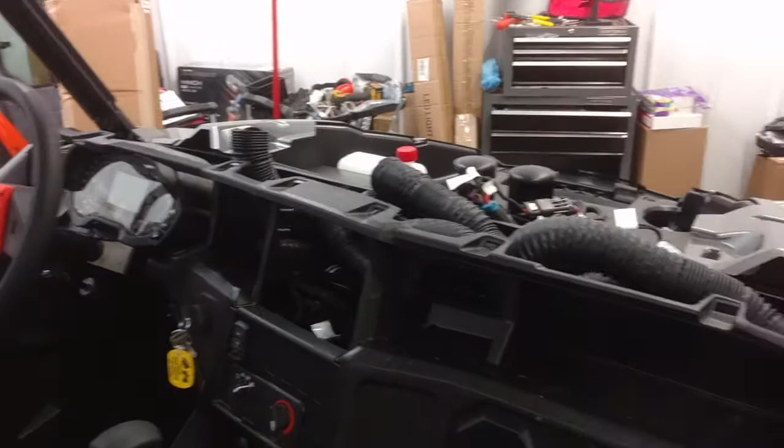If you're just putting a wiper in a machine that does not have the overhead radio or a mirror, you can probably just skip the first few minutes of this video and get into the portion where we're actually putting the wiper on the windshield and running the wires. The wiper is mounted up top, and then the wires are ran down through one of the roll cage members, across the dash, and then everything comes out by all that other wiring there.

I already have the top cap off of this one. I actually just put a heater in this one, so I never put the top cap back on. I believe that is the first step in the instructions, but first we're going to hop and see what's in the box.

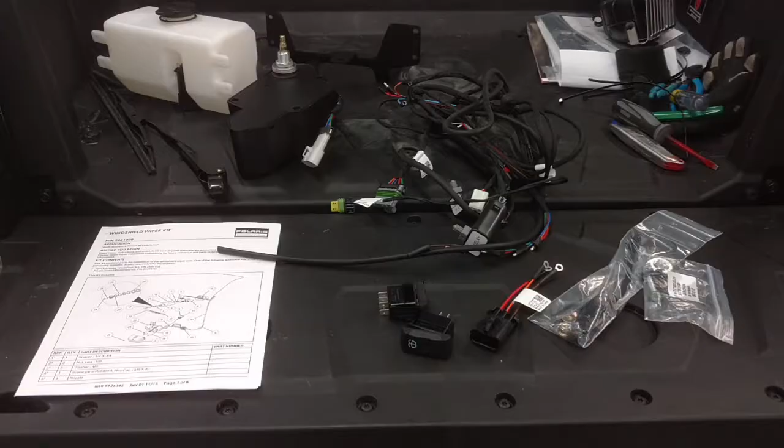Here's everything out of the box. The part number for this kit is 2881090. It is the OEM Polaris kit.

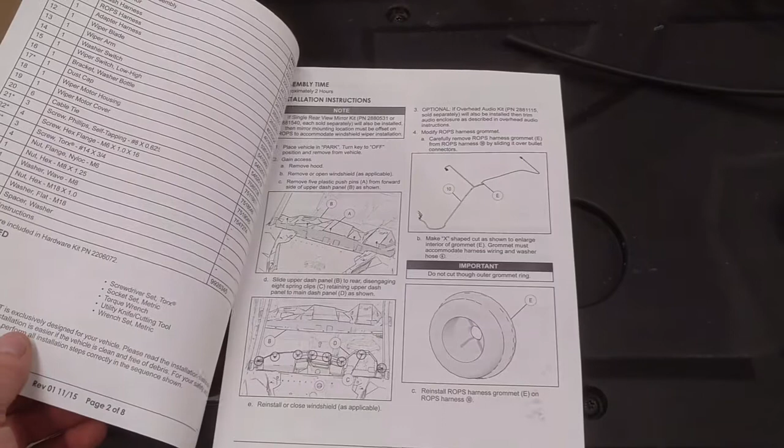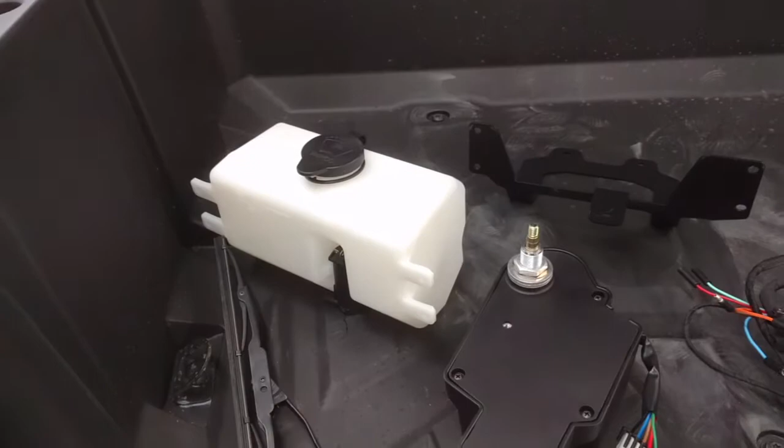I've put a few of these in. You got the wiper - I just put the arm and the blade together already. Washer tank, the wiper motor itself, the bracket for the washer tank, the wiring harness and the tube for the washer fluid, some switches, and then some hardware.

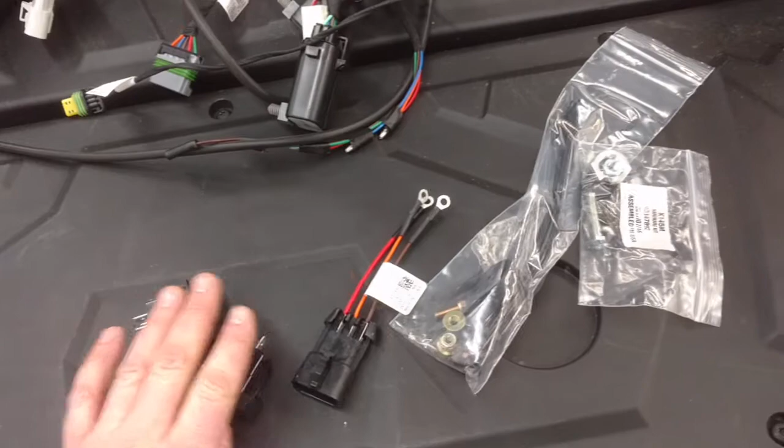First thing I'm going to do is remove the roof, if you have one on there. That is those two bolts right there, and then that bracket comes off, and then this entire back panel kind of pulls back and up.

Once you clear the top of the roll cage, then the entire roof can slide forward to release those claws that are grabbing into this piece of plastic right there. So start by getting those two bolts out in that bracket, and we can take the roof off pretty easily.

Here we have the roof off. Now what I'm going to want to do is take this panel off while keeping the radio installed. I'm going to attempt to do this while the radio is still in the machine. If you don't have the radio in the machine, if you got it out of the box, it'll be even easier. But I'm going to try to see if this works.

You need to take out this screw, that screw, those four on the top, and then there's two more on that side, just like this one. Be careful when you take these out - there's a little spacer that's underneath between kind of the radio and this piece of plastic here. Make sure that doesn't get lost.

So there should be 8 screws total, I believe. I think we need to leave those two on each side to keep the radio in place. So I'm going to pull those screws off, and then I believe this whole thing can actually slide forward and come off. There was 2 more screws that I forgot.

This one right here, and then that one right there. Once those come out - I dropped a couple spacers, even though I said to watch out for that, so they might come falling out. This whole thing pulls out.

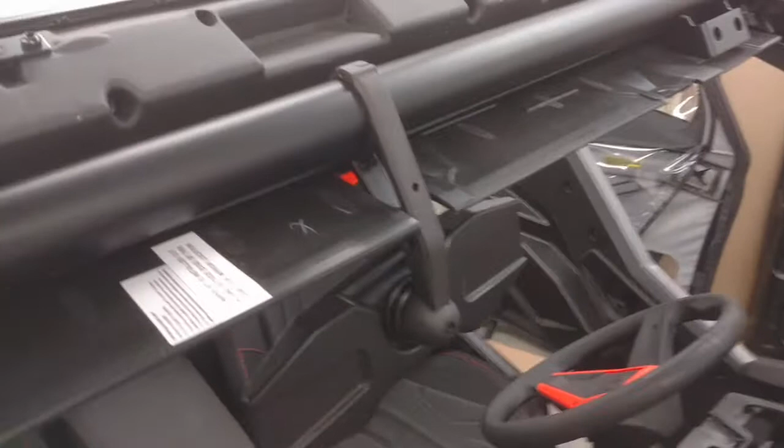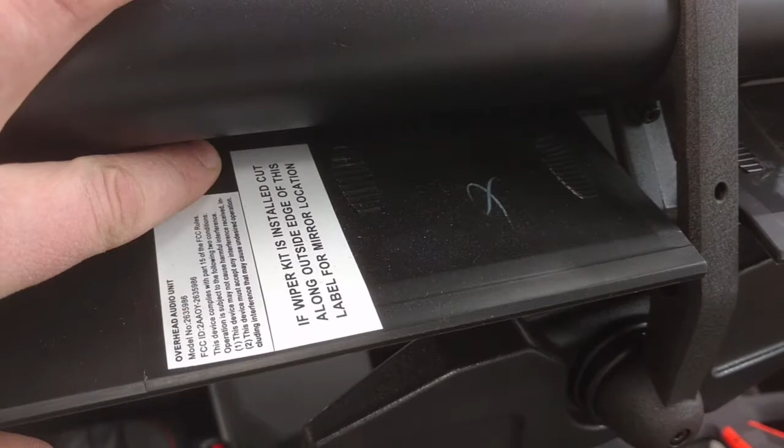And what we're left with is kind of the exposed part of the radio up there. And what we need to do is, right where that sticker is, if a wiper kit is being installed, cut along the outside of this label for the mirror location. So you literally take a knife, cut the outside of that sticker through the plastic, and then we're going to be sliding the mirror over, I don't know, about 6 inches or so.

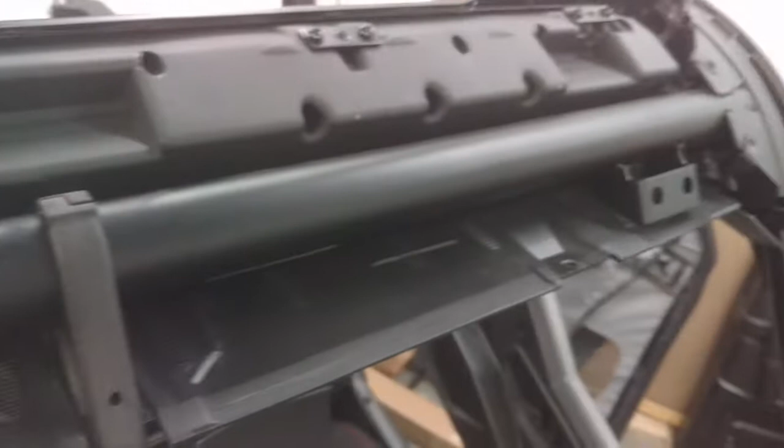There's a scribe mark here, a weird trapezoidal shape, that we need to cut out because the wiper body needs to fit in there. This would be easiest with the radio out of the machine, but I don't want to undo all the wiring and bolts, so I'm going to cut it out with a utility knife while it's still in the machine. I just need to follow the line, connect the dots, and cut out that sticker. Then we move the mirror over so we can mount the wiper to the windshield, and that plastic won't be in the way anymore.

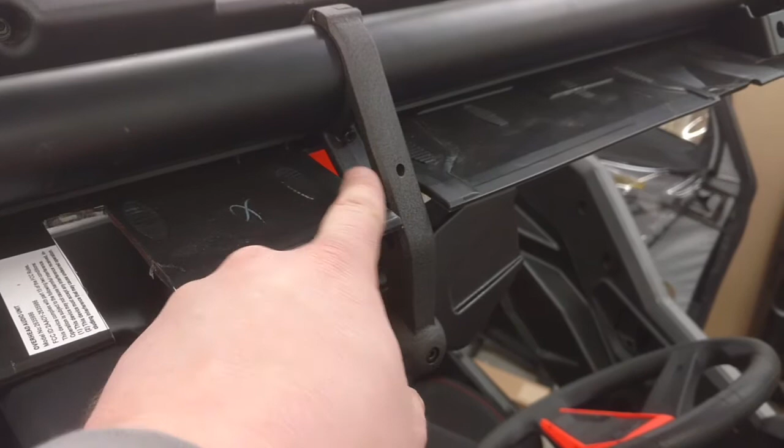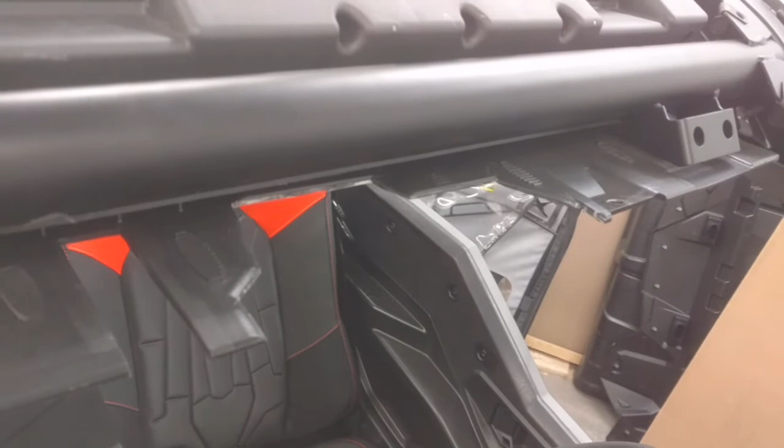I'm going to get that cut out. There, I got that piece of plastic cut out. Now I'm going to stick my Allen wrench through this hole so I can loosen that and slide the mirror over to this position. I've cut out that template just using a utility knife - it was really soft, I didn't need anything else. Just follow the lines; the one under this bar is a little hard to get at. If you cut everything else out and then just score that one, you can bend it and it snaps.

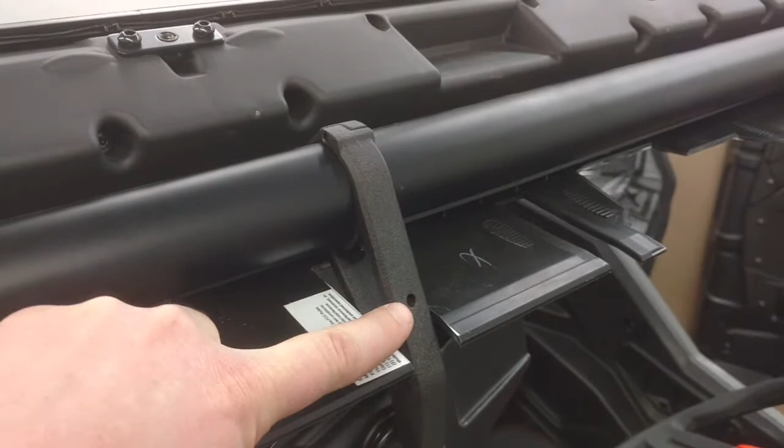Move the mirror over and then tighten that down with the Allen wrench that goes through that hole. We've done the modifying that we need to do. Now we can just hop into the instructions and follow through with them.

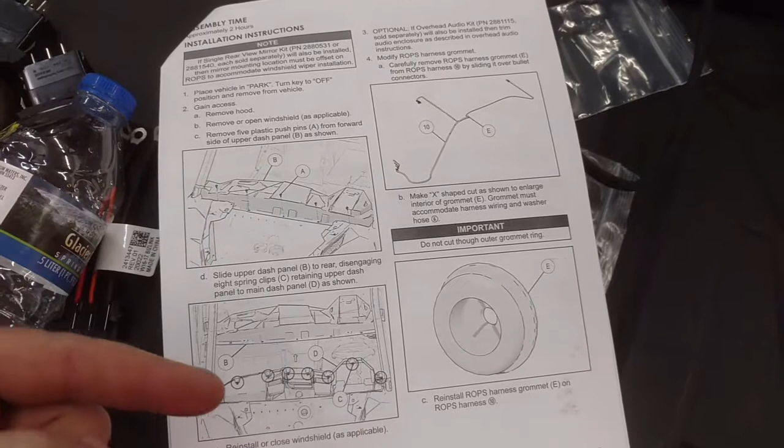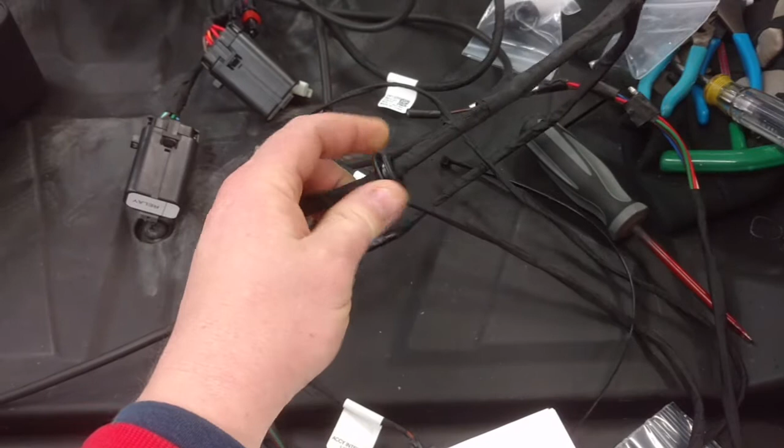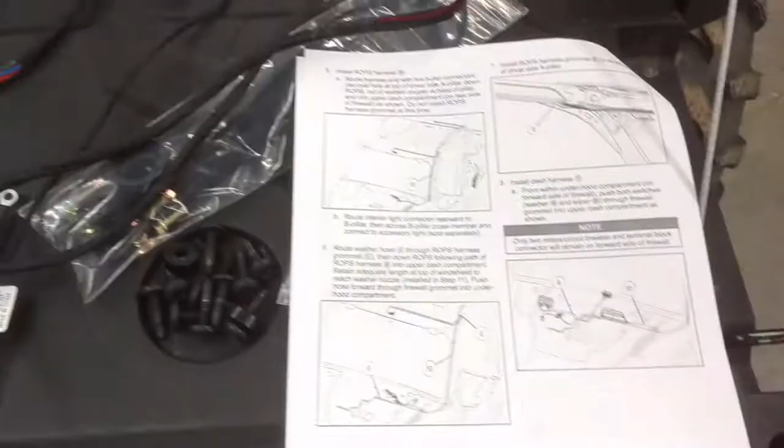We've already taken off the top cap. Now we've got to take the wiring harness that goes through the ROPS system and peel the bushing, or grommet, off of there. We need to get this off by sliding it and actually cut it a little bit bigger so that we're able to slide this hose through it as well. I cut some marks in that grommet so there's more room to slide the hose in. Now we're actually running the harness - it does go through the ROPS system.

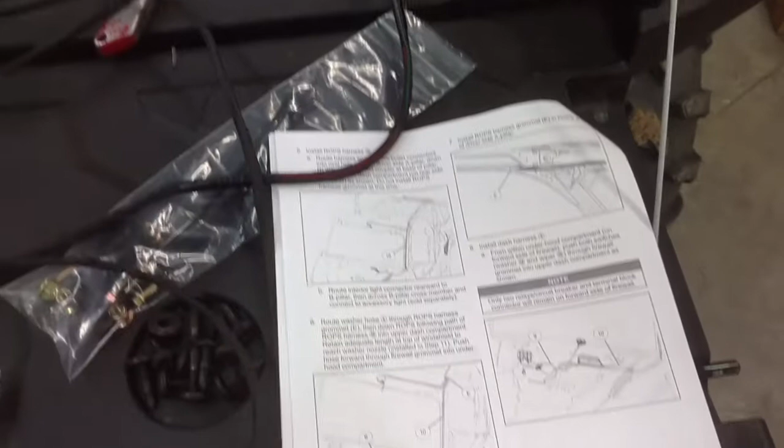So the top end is going to be these two plugs: there's the wiper plug, and then there's a dome light plug that just comes on this unit. Then on the bottom, you have a series of bullet connectors, which is going to connect to the main wiring harness once we have it run.

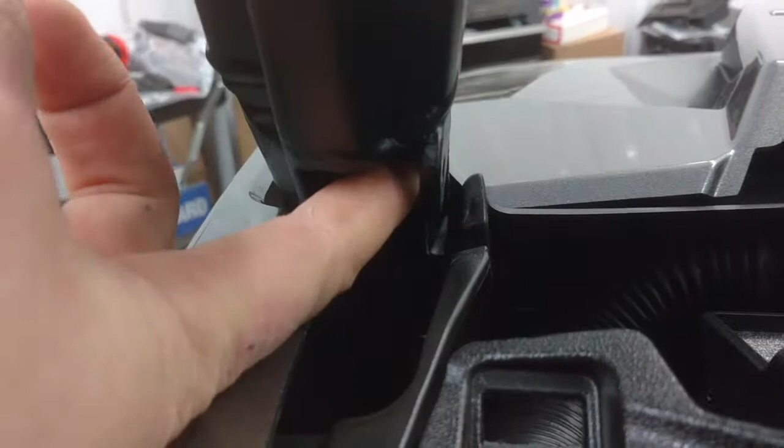So what we need to do is take that harness and slide the bullet connectors - I can't see it very well, but there's actually a hole here. Put the bullet connectors in there, feed it down through, and then they'll be coming out right here. Then they go through this little channel and end up right about here, where we will connect it to the main wiring harness once we run that as well.

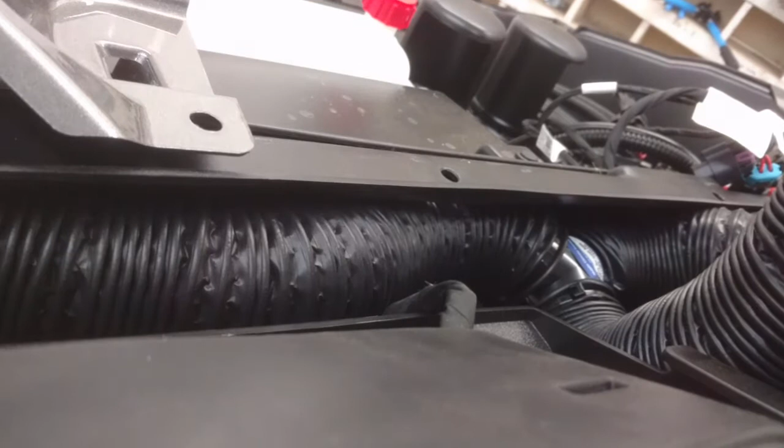So we're going to run both of the harnesses. This is the hardest one just because we have to run it up through the tube, and there should be the plug and then another 3 feet or so of that other plug for the dome light. I tried sliding it down and I couldn't get those bullets to go through the bottom hole very easily.

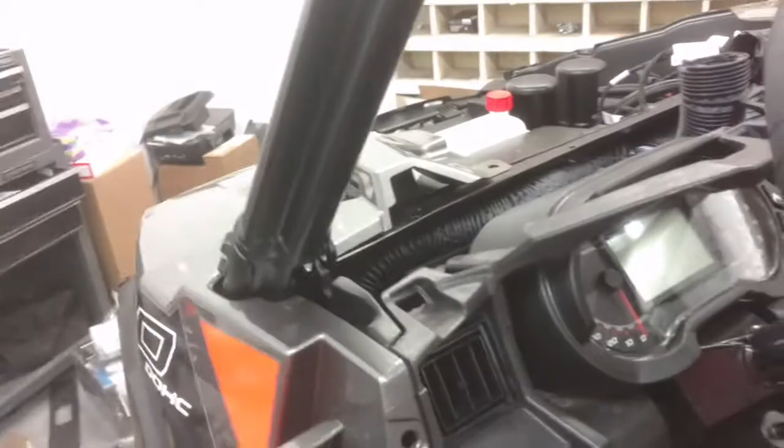So I just took a piece of mechanic's wire and a little electrical tape, and I think it's going to make it a little easier to get out the bottom. So just feed it through. And I was having an issue with it lining up with the hole at the bottom.

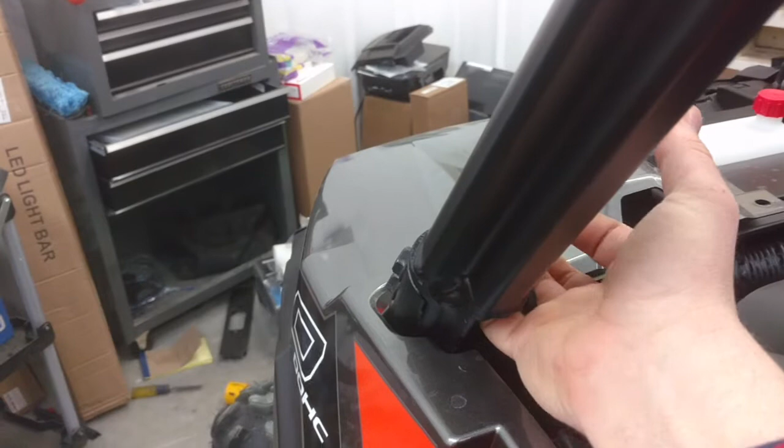This is kind of hard to do. You just need to keep poking at it until you get it to come out the bottom hole. Once you get the wire started, you can grab it and pull the rest through until you get to the grommet location, or where it was originally on the harness. If it does need to move later, that's fine. Then the grommet just squeezes into that hole we had there so the wires aren't leaning up against the sharp edges.

Alright, after fighting with this thing for like 15 minutes, I decided to take a different approach. I've done these many times in the past.

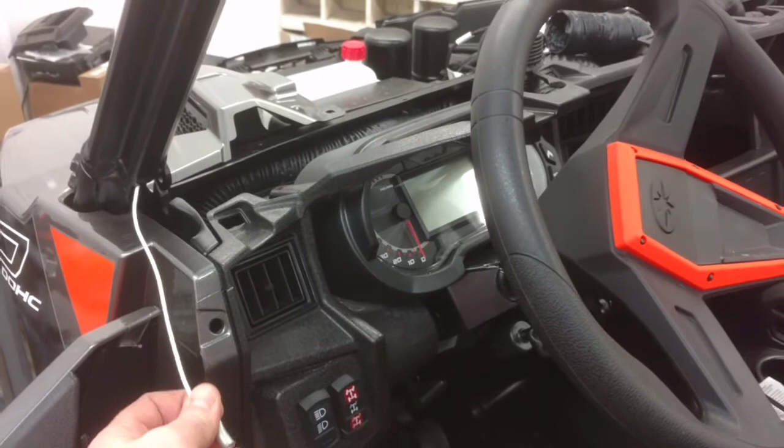I just ran into an issue with it wanting to come out the bottom, so I took a little weight, which happened to be a terminal connector, taped that to a piece of wire, and was able to slide it through and eventually find the hole at the bottom.

Now I can tape the harness onto this wire. We want to run the water hose at the same time, I guess I never said that, but yeah, the water hose goes at the same time. We'll tape those to this wire, and we should be able to pull the whole works through just by pulling this white wire through all at the same time.

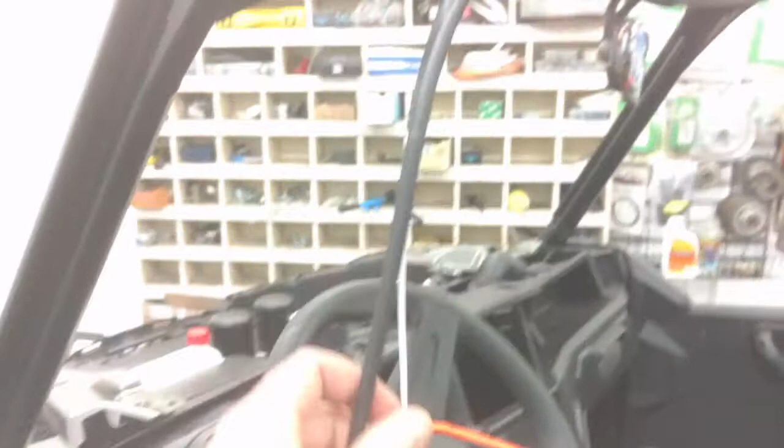So here's how it looks when I got it hooked up. I got the harness and the washer hose taped together, and then both of them taped to this white piece of wire. As I pull on the wire, you're going to have to kind of pull at the bottom while finessing it through the hole at the top. We should be able to pull it through. Here I got it down through the bottom.

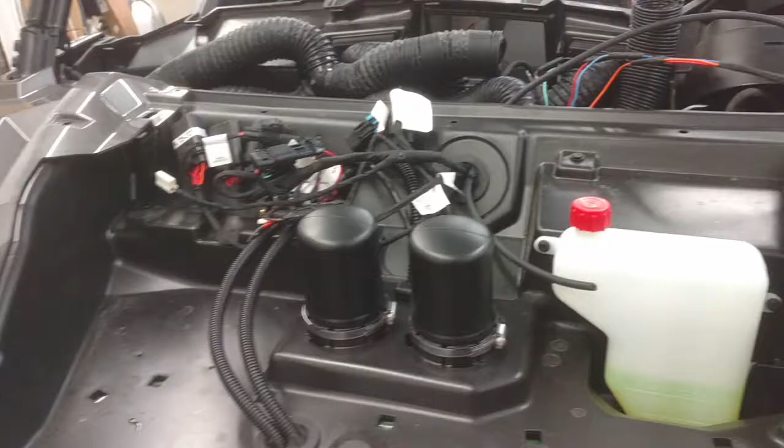So right now, once I get the wiring harness to pop through the hole, I can undo the white wire, pull that free, and then get the harness aligned where I need to. I think this grommet's in approximately the right location, but we should be able to move that or the wire/hose individually later. I did quite a bit in this step, but it should make sense.

The main wiring harness had 2 relays. You poke a quarter inch hole in those little dots, and that's where the 2 relays plug in.

There is a plug-in for the electrical, so that has the battery positive, battery negative, and then the key-on switched wire. That's just an unpluggable connector with the powered ends. This powers the whole harness.

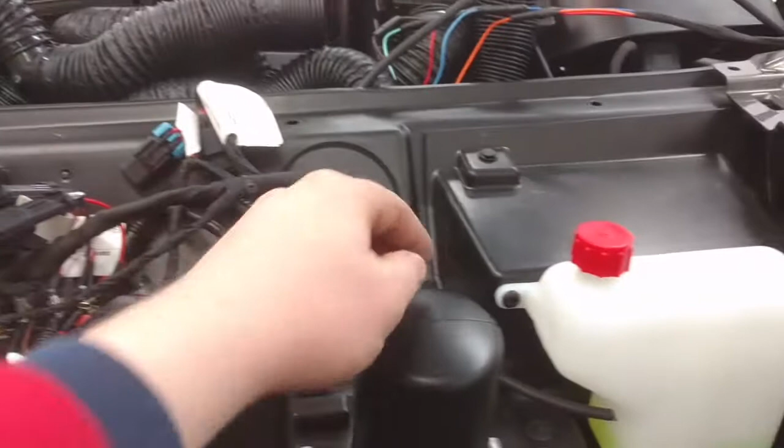We have this piece, which is going to plug into the washer tank when we mount that, as well as the washer hose. I might need to pull a little bit more of that out of there, it looks a little short.

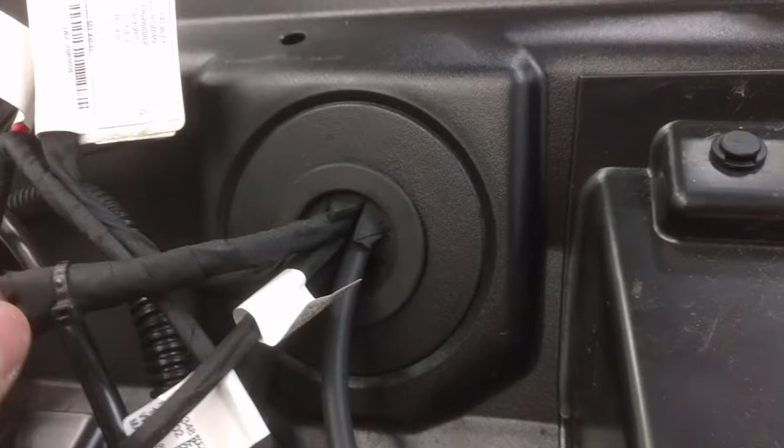Through the grommet, all the wires have to go. So a lot of times I'll just pop the grommet out, slide the wires through, and then put it back in. The switch wires go...

...up to that panel right there. We got to cut out the cutouts for that. That hasn't been done yet.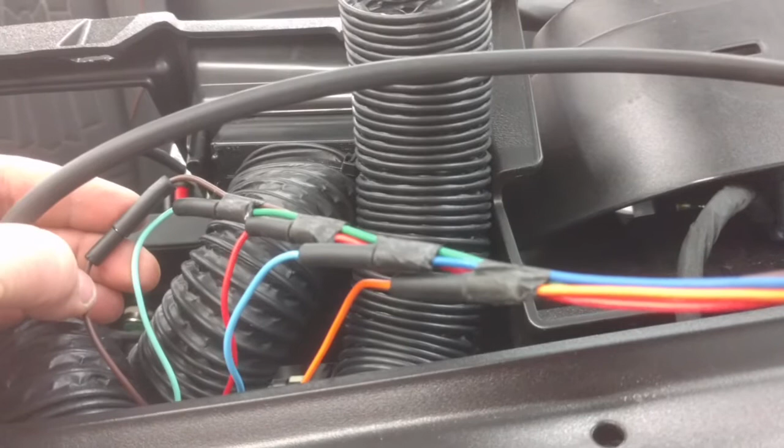Here's where the two wiring harnesses connect. It's pretty easy, you really can't screw it up, you just color match the wires: orange, blue, red, green, brown. And then I'll tape that up.

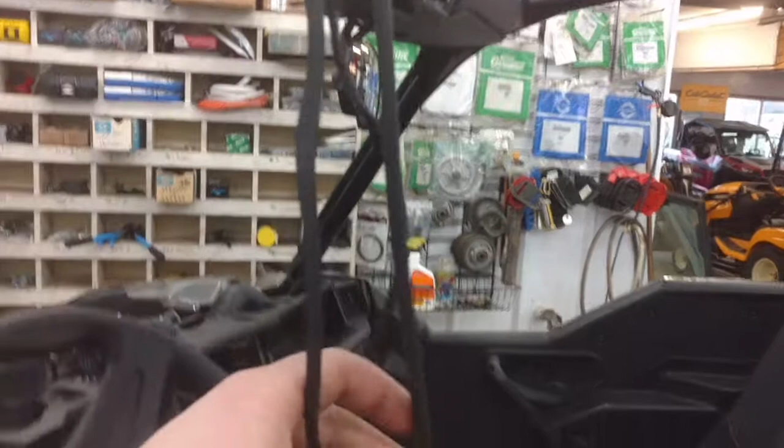And then they come down through the frame there, that goes up there. Eventually we're going to run the big plug and the hose over to approximately where the rearview mirror is, and this back one goes around back here, but we can do that once the roof is on.

This isn't even a wire we're going to be using in this install, but if you put a dome light in or some other accessories, you have a key-on power wire for something like that.

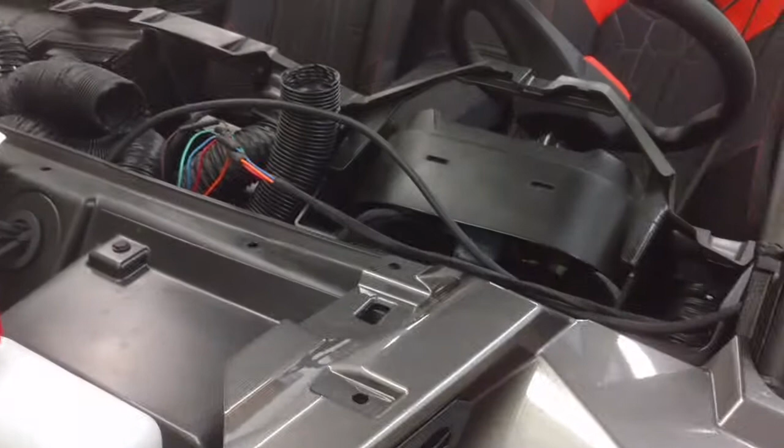I'm going to get this straightened up, and then I believe the next part in the instructions is to cut out those holes.

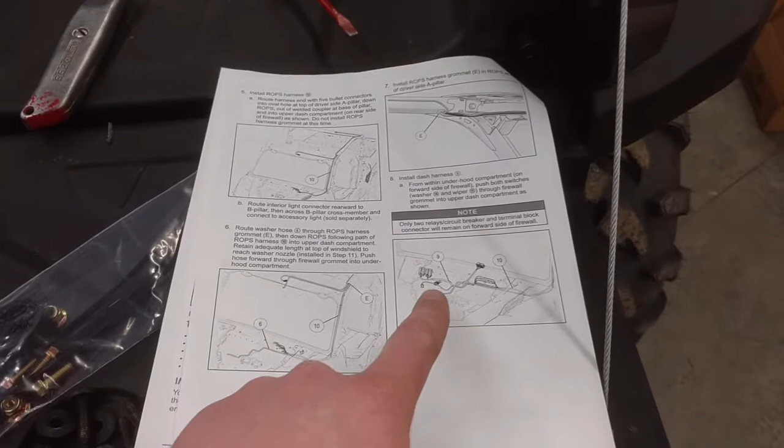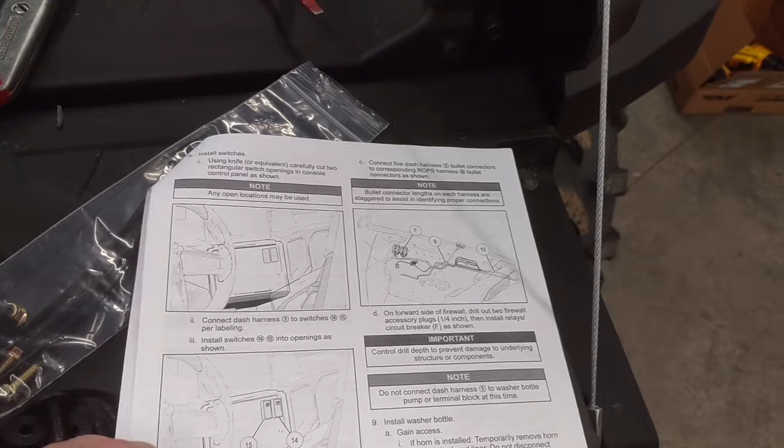So yeah, we ran the upper and lower wiring harnesses. We just need to cut out the switch holes. Yeah, it looks like I kind of just jumped ahead as far as hooking up those relays. And then we get to the point of installing the washer tank and mounting the wiper motor to the windshield.

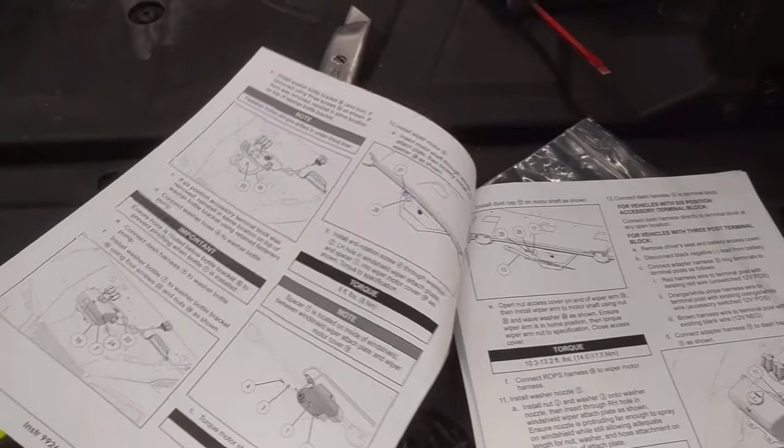So I'll get the washer tank put on here and the cutouts made.

Here we got the switches installed in the dash. You can really put them wherever you want. They show them going on the right hand side, but you can cut out any of those cutouts and put them in any position. And then I got the electrical hooked up on the back side.

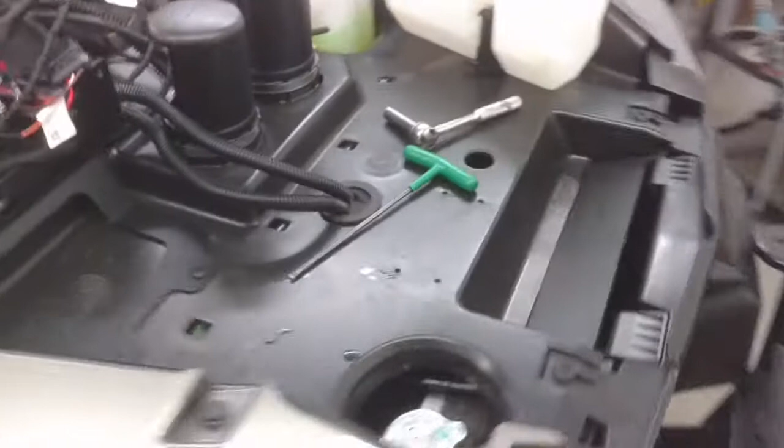Also got this mount plate put on, with 2 screws right here and 1 right there. These power cables are really stiff and I kind of use the same space, so I just went around the side. I'll maybe try to tuck them under after I get the bottle installed.

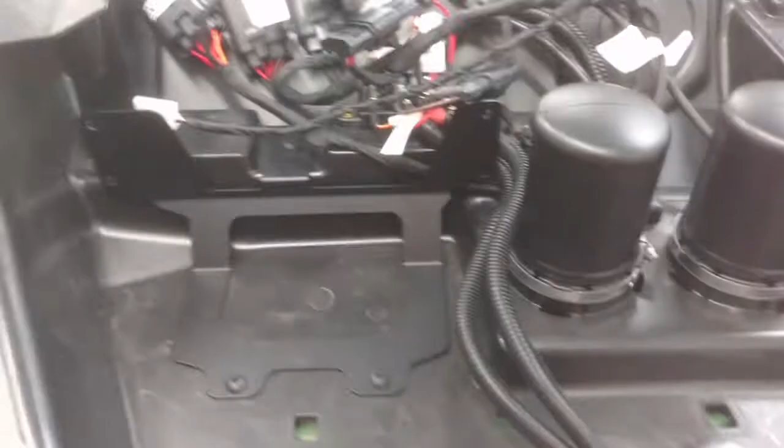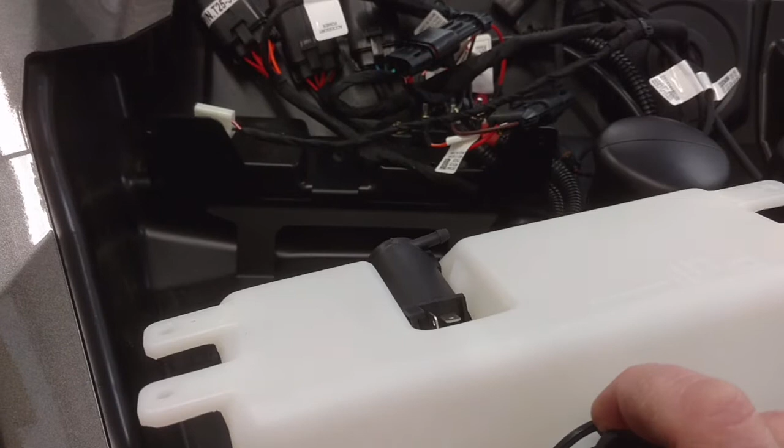When we put the bottle on, that is going to bolt on there to there, and slide in like this. The only thing is we're going to want to put on the bottom hose and probably even that electrical connector before we actually start bolting it on. So this is the point we're going to need to figure out how long a hose we got. It looks like I might need to pull it another 2-3 inches to get it so that it lines up with that hole.

There's some 4 gold pieces of hardware that hold that on. One thing I will say, and I have done this before one time, is I dropped the nut and it went down here into what I believe was the clutch duct, and it was a big job to get it out of there. I had to take the floor panel off and everything, so make sure you don't drop any hardware down there. But I'll get those lines pulled out, hooked up, and get the wash tank installed.

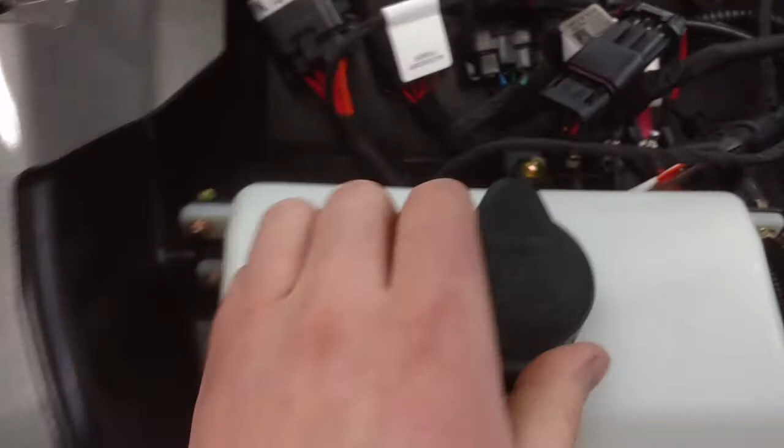Here I got the bottle installed. You can see that it's kind of a hard mount, screws onto that mount plate we have. Got the hookups, and then also ran the wires over and down.

At this point we put the windshield wiper itself on the windshield. So I'm going to pop the windshield out of the box, being that this machine didn't have one yet, and prep that for the wiper.

Here I got the windshield. We need to drill out those holes. Usually I just use a step bit and drill them out to the appropriate size. There's going to be the big wiper stud, which goes in the middle, another wiper connector point on the side, and then the washer fluid spray nozzle goes through the other one, and that's going to hook up to the hose in the cab, and obviously the big plug-in is going to hook up to the wiper itself.

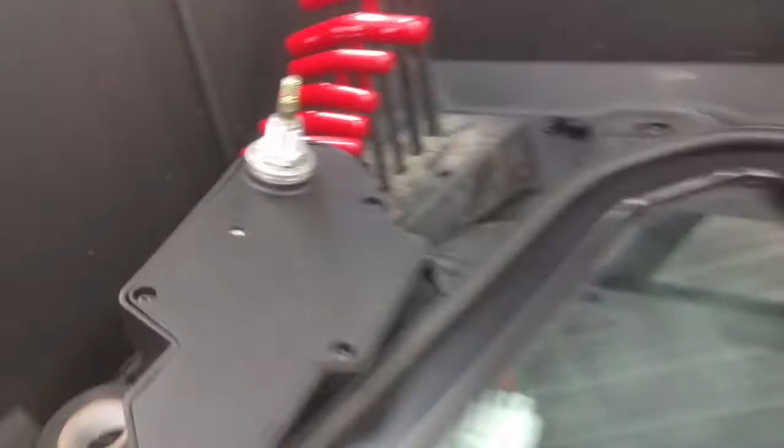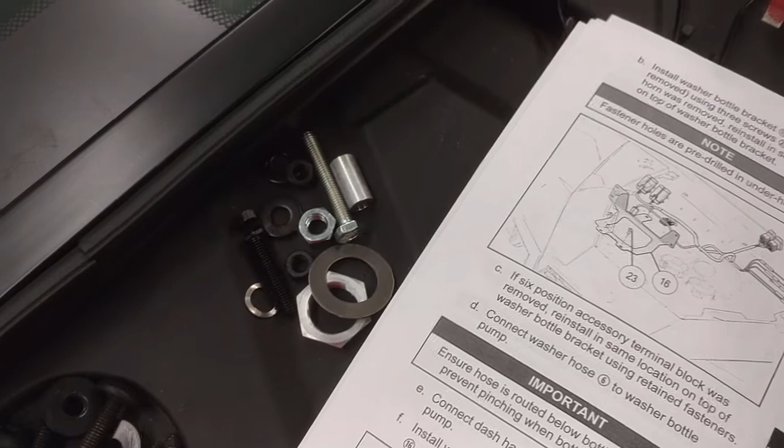So I'm going to get those drilled and mount it. There is a spacer that goes between the wiper attachment plate and the wiper motor to compensate for the thickness there. So that should be just this bolt, that spacer, and then one of those black washers. And then the washer nozzle is going to use a nut, the other washer, and then a nut on the back side to pinch it in place.

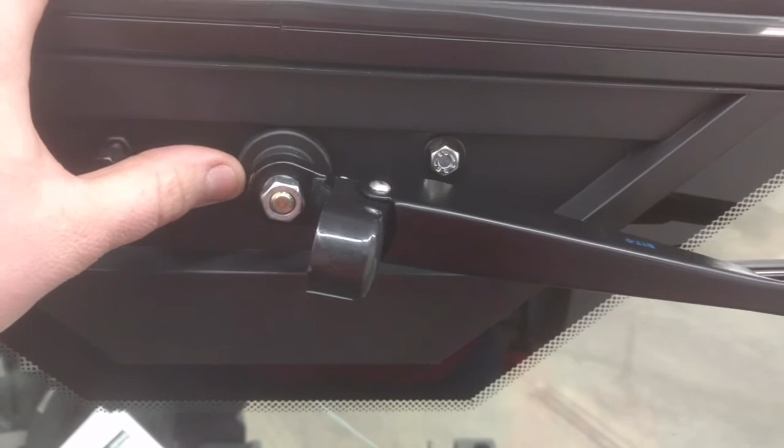So here's what the wiper looks like installed. We have the wiper motor that came through, and that was just held down by a bigger nut and a bigger washer. Then there was this rubber fitted grommet that goes over that just to make it look nice really.

Then the wiper blade gets pushed on, and it's a tapered post, held in place with a little washer and a nut. Just tighten that down. You can adjust the wiper as needed. I usually get it as high as possible so that the driver's not looking at it when they're driving - it's not a distraction. It's about where it should be. They typically start to sag a little bit once they get used a little bit.

This is the one I was talking about where there's a spacer. So let me grab the phone a little differently here, you can see it down in there. There's a spacer that goes between the wiper motor and the windshield, and then just the bolt and the washer.

And then you have the spray nozzle, which goes through a nut, then a washer, then through the windshield, and on the back side you have another washer and a nut, and you tighten it. Then our spray hose will actually get pushed on that, and I usually zip tie it on as well, otherwise it tends to drip a little bit. So right now I'm going to put the dash back together, because we're going to have that top cap on in order to be able to put the windshield in.

Here I got the top cap back on. You may not have had yours off, I had just put a heater in this one, so that's why I had mine off. We're going to need to put that top piece on, because that's what the top of the windshield actually sits up against. One thing I will say, which is pretty easy to do, is when you're putting this back on, make sure your wire and your hose don't get pinched between that and the bar. Happened to me one time, and then my washer hose didn't work.

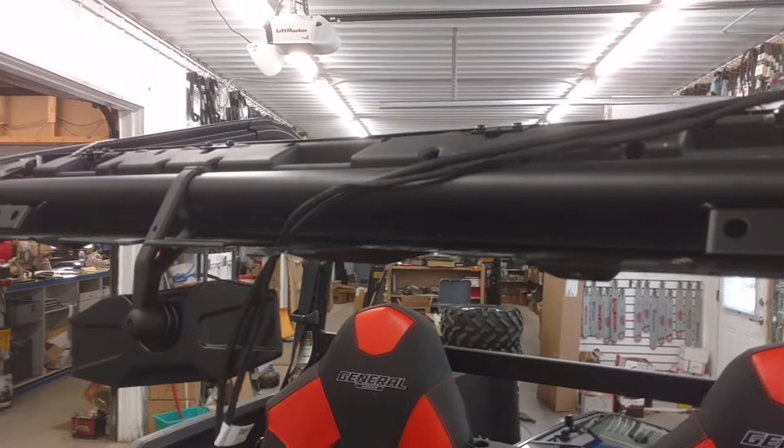So being that this one has a radio, we kind of just have to tuck the wires up in there, obviously making sure they don't get pinched when we hook everything back down. If you don't have a radio, this probably isn't going to be an issue. You can just put the top cap on and then kind of zip tie your wires out of the way as you go across. But being that we do have the radio, you can't really see what's going on once it's in there, so we kind of have to get the wires put into place. So just be careful. I'm going to snap it back into place and screw down all the screws that we took out at the beginning.

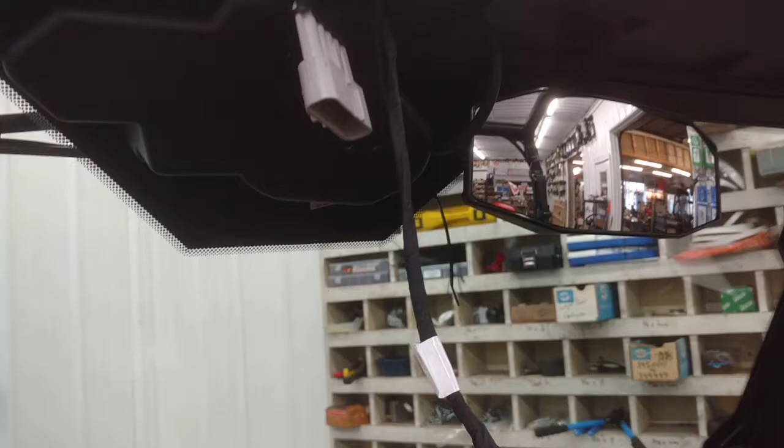Windshield in. Took 2 people usually to do it right. I don't know if you've seen a video where I've talked about this, but with the lock and ride clamps, I recommend loosening up that nut, getting the windshield in place, tightening the levers, and then tightening up the nuts after the windshield is installed to get the best fit.

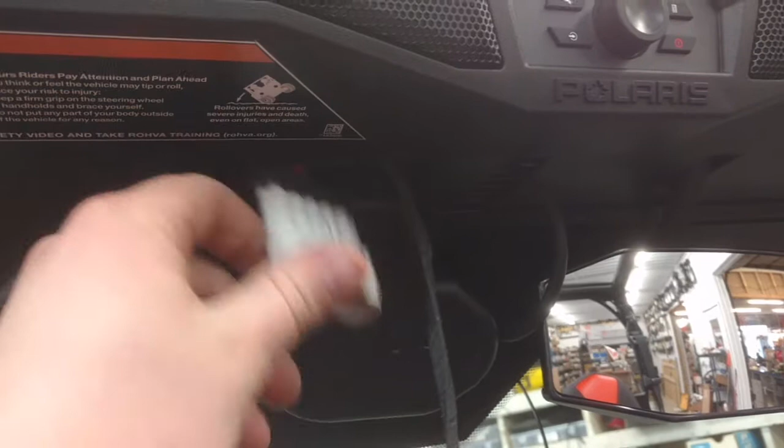Here all we got to do is plug in this connector, and then you can kind of take the wiring and the whole connector and shove it up in there, kind of make it disappear. And then we got your washer hose, which comes out through there. I already got it hooked up to the fitting, and then I run a zip tie to make sure that's tight. And then here's the relocated mirror, obviously. So I'll get those hooked up, and then we should actually be able to test it. So fill the washer fluid tank full of washer fluid, and then we can actually test the switches once we get it hooked up.

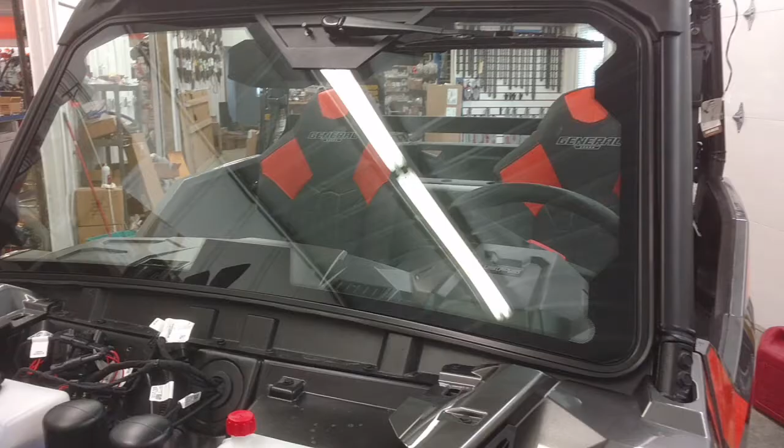So here's everything fully installed. I haven't put the roof back on, or the hood obviously, but that's the wiper fully installed on the windshield.

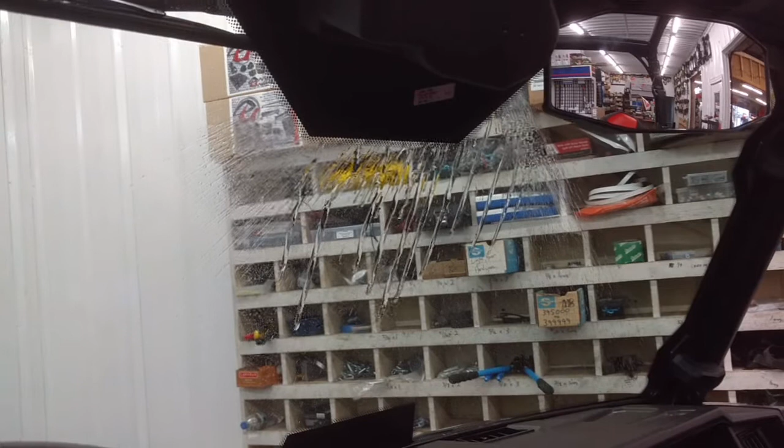I did fill the wash tank with fluid, and then to test it, we got high and low settings for the wiper, and then the washer fluid. I guess this is the first time I've ran it. Spreads that out. Make sure it's not dripping inside the cab. I've seen that happen several times on the Generals.

Pretty nice kit. You know, I wish the blade would go over a little bit more to the passenger side, but it's actually doing pretty good for being a single blade system. And then the washer works pretty well. One little gripe that I have is it'd be nice to get that fitting to come out maybe another 1/4 inch, so it's not hitting so much of the black plastic, it's getting more of the spray on the windshield. But if you do that, then you don't have enough threads on the inside to hook the hose to, and then it starts to leak all the time. So find a happy medium. I probably left 3/8 of an inch of threads on the inside to hook my hose to.

So obviously, if you got a roof, throw that back on. This is that one wire that we had left over, which if you put like a dome light in or something like that, that's what this plugs into. They just include it in the harness. So it's not needed for the wiper, but is for some other accessories that are mounted to the roof. So if you're not using it, you can just bundle it up and zip tie it off to the side or zip tie it underneath the roof.